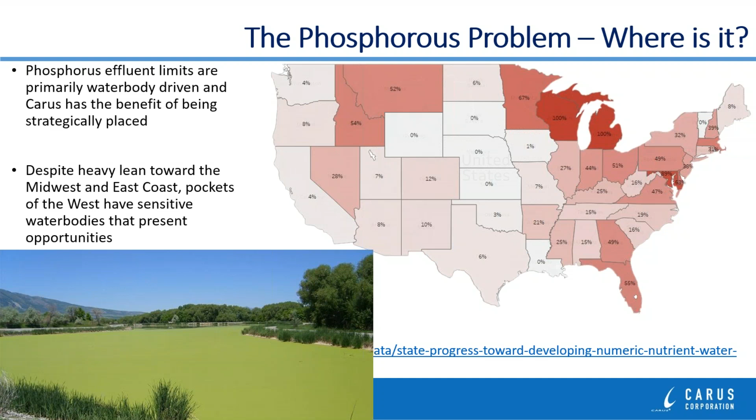In the case of aluminum sulfate, it's pretty inexpensive, it's very widely available, and it's pretty easy to use and apply. Now, there are some drawbacks to using aluminum sulfate. It's best within a very targeted pH range. Otherwise, you might have to feed more in order to get to the lower total phosphorus levels.

Dewatering can sometimes be difficult because the sludge will become gelatinous from the increased dosage of the aluminum sulfate. It does generate quite a bit of sludge when you use it. It doesn't always work the best to get low turbidity removal in your plant, which means it also can increase your settling rate, so it may take longer for the solids to settle in your clarifiers.

It does have a freezing point down to 9 degrees Fahrenheit, but you can get some crystallization in the feed lines, which means you might have to heat trace the tank and the lines if you're feeding it outside.

In the case of polyaluminum chloride, it is pretty widely available. It does create less sludge compared to the alum at the same dosage, and it does work over a broader pH range than alum. It does have a slightly higher cost than aluminum sulfate. It still does have the same slow settling rates that you would see in aluminum sulfate. In colder wastewater, it doesn't help as much with turbidity removal, but it does have a slightly lower freezing point at -4 degrees Fahrenheit.

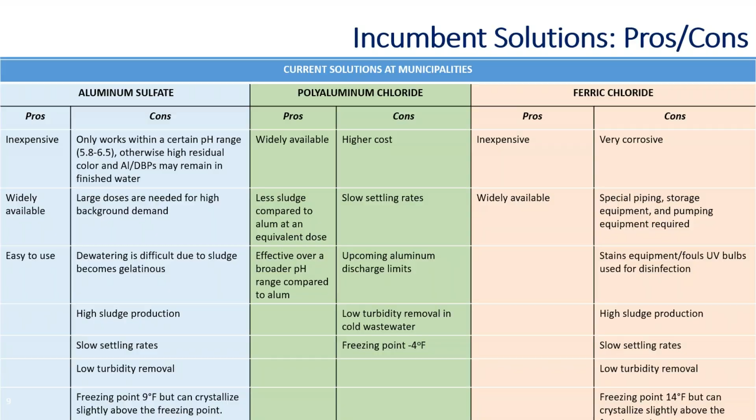So one of the challenges that a lot of plants have as their total phosphorus permit level is being lowered is that they're not as efficient when you get to the much lower total phosphorus removal limits. Typically, we talk about a molar ratio, or how much of the product you need to feed per part removal of total phosphorus that you have in the wastewater. At a level where you have a target dosage of 1 milligram per liter as total phosphorus in your discharge, that ratio tends to be about 1:1 for those products, and along with the ULNR.

As you restrict that level and that total phosphorus drops to 0.3 to 0.1, or even to as low as 0.075, that ratio starts to climb for the iron and aluminum products to the point where it becomes 3:1, 4:1, 5:1, or even more in order to get to those low levels.

At that point, you're going to have to feed much more of the iron and aluminum-based products, which means you're going to generate a lot more solids, which then are going to increase the solids loading through your treatment process, and the solids that you'll have to get rid of at the end of the treatment process. Sometimes, even with adding additional alum and iron salts, you can't get to the 0.1 or the 0.07 milligram per liter lower levels that you need to achieve if that's what your permit's going to go to.

The ULNR product is a water-soluble rare earth chloride for rapid precipitation of the total phosphorus in your plant. Because of its high concentration and its formulation, it greatly reduces the amount of product that you need to achieve those ultra-low final phosphorus discharge limits at your plant. Based on that lower dosing, that then ties into less chemical sludge that's generated in the treatment process.

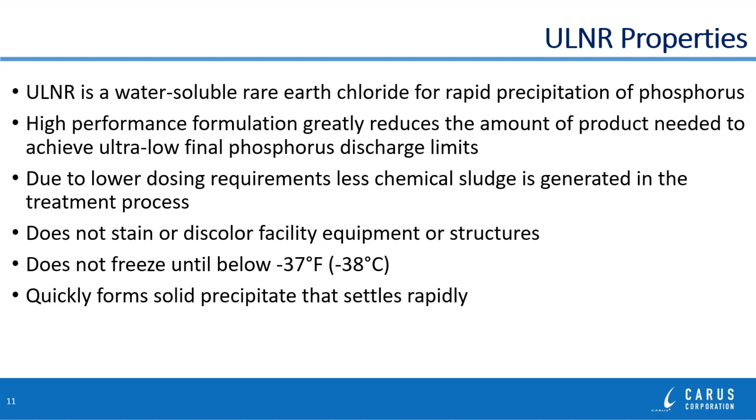At this plant where we were doing this jar test, based on the current polyaluminum chloride dosage treatment, they would need about 225 milligrams per liter of polyaluminum chloride to get from approximately 5 milligrams per liter of total phosphorus down to about 0.34 milligrams per liter as total phosphorus on the discharge. You only needed about 45 milligrams per liter of ULNR to get the same total phosphorus removal in the jar test. So you can see there's a much greater difference in dosage when you have to get to that 0.3 limit.

So let's talk about some field trials out there in the Midwest. Our first plant trial was at a 50,000 gallon per day Midwestern plant. In addition to normal wastewater from homeowners, they also had 2 cheese plants in the distribution system that added phosphorus as an industrial input.

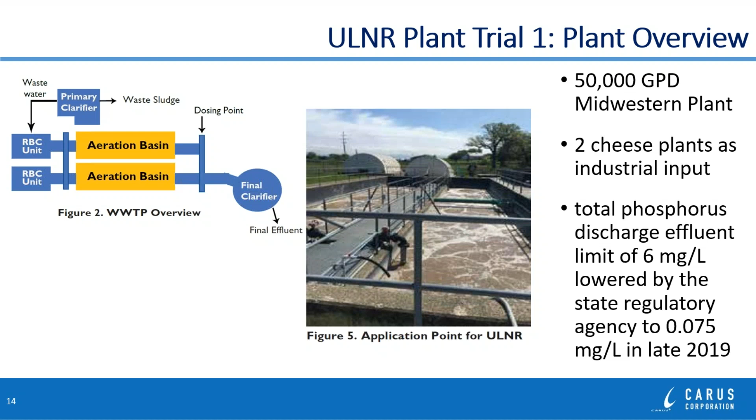Prior to doing the plant trial, we did some jar tests looking at how much ULNR would be required to remove the total phosphorus in the plant. At the time that we did the jar test, their influent level was up around about 6.5 milligrams per liter as total phosphorus.

So that translated to the plant trial. We dosed 13 gallons per day of ULNR into the wastewater. And we also changed: prior to this application, they had been applying their current product to the front of both aeration basins, and they had 2. Because we were moving it back in the process, we could treat the 2 aeration basins' effluents combined, so we only had 1 application point. So it also minimized the feed system that they needed to have as well.

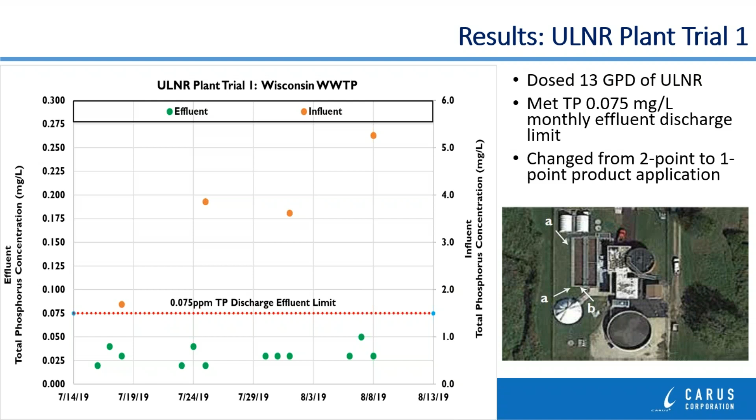Our second plant trial was a 135,000 gallons per day activated sludge facility. They got an additional 40,000 gallons per day of wastewater and sludge from private systems in the surrounding area. Their current treatment process was getting their discharge down to around 4 milligrams per liter, and they anticipated a future limit from the state of 0.12 milligrams per liter from the 4 that they were at now.

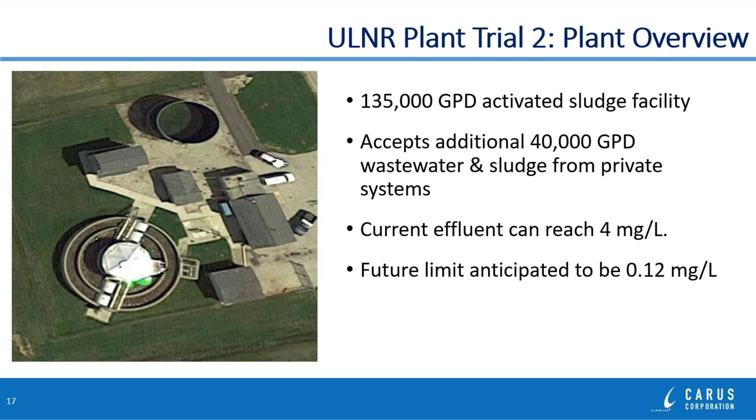Same thing here. We ran jar tests at the beginning to see what we could do to get to their new limit. And the jar test determined somewhere between 7 and 28 gallons per day of ULNR was predicted to meet the discharge permit of 0.03 for the total phosphorus target.

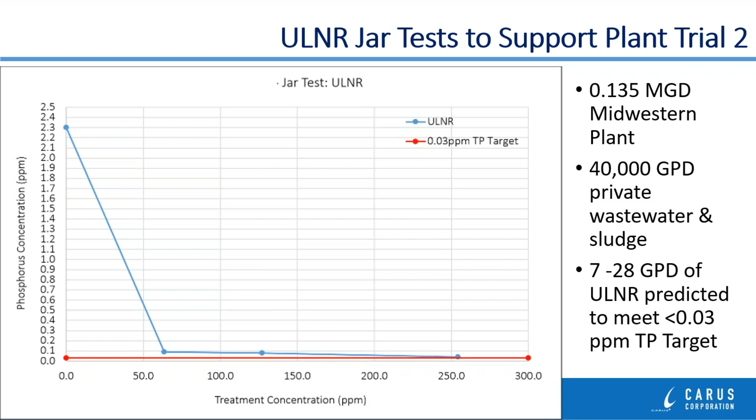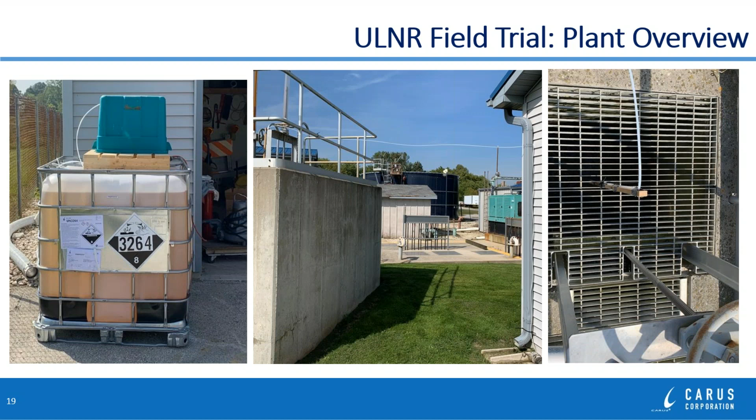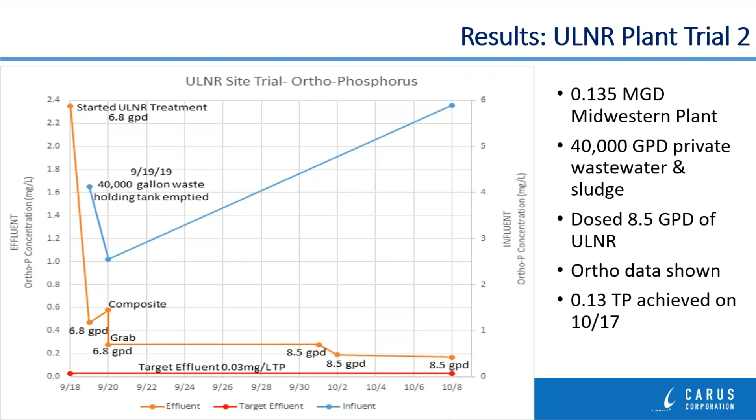Our third plant trial was a plant that was a 25,000 gallon per day activated sludge facility. They did accept some sludge, about 6,000 gallons per day of wastewater and sludge from private septic systems. Their current total phosphorus limit was 6 milligrams per liter, and they also had a cheese manufacturing facility nearby that dumped into their system. And they estimated that their future limit was going to be 0.12 milligrams per liter.

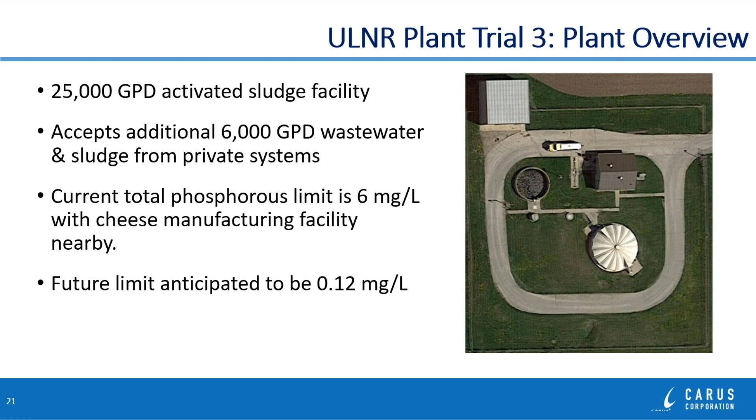Once again, we did a jar test to look at the dosage required. And we predicted somewhere between 5 and 10 gallons per day of the ULNR product was going to be needed to achieve the 0.12 target total phosphorus discharge permit. And you can see that in the graph there as we get lower where the dosage needs to be.

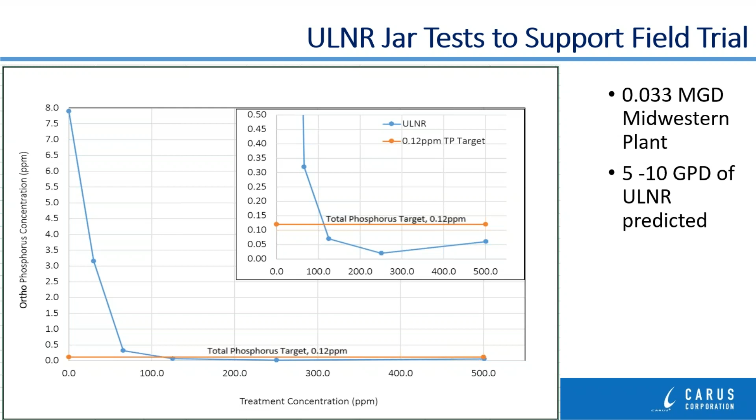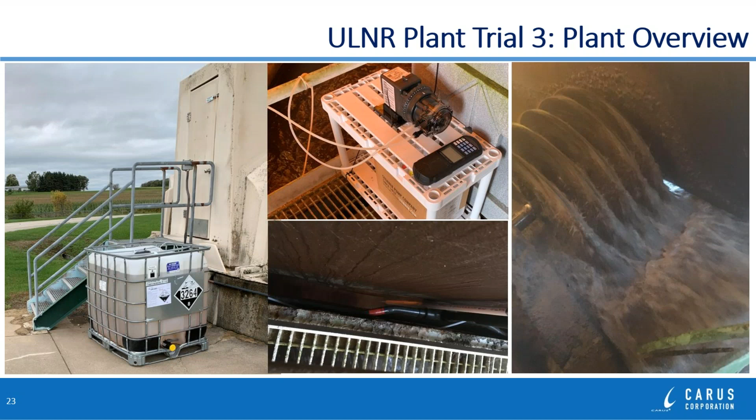Just like the other plant, the setup was a tote outside the building for our application point. We ran the feed line into the building and fed with a small Stenner point feed pump. And then you can see the application point running through the PVC pipe alongside of it with the flexible tubing, and then discharging into the discharge, where you can see there's quite a bit of turbulence. So we got very good mixing at this application point.

When we started this trial, the total phosphorus coming into the plant was up around 5 milligrams per liter. We started at about 9 gallons per day of ULNR. We quickly saw a drop in the total phosphorus down to below the 0.12 milligram per liter, which was the target. And toward the end of the trial, we even got a non-detect on the total phosphorus in their discharge. So basically a zero discharging it at 9 gallons per day.

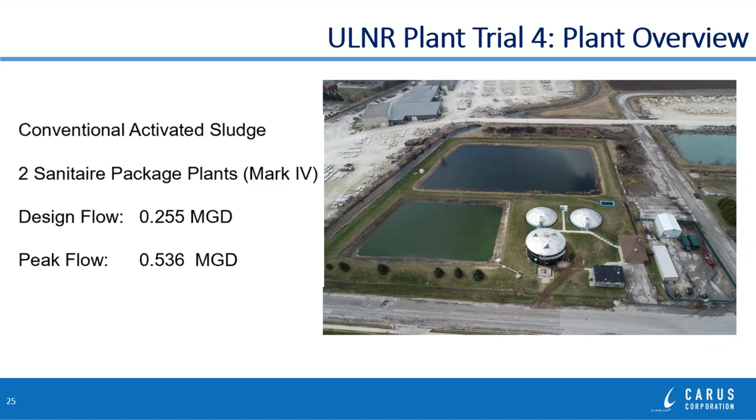Our fourth plant trial was a conventional activated sludge plant. They had 2 Sanitaire package plants with a design flow of 0.255 mgd and a peak flow of just about double that at 0.536 mgd. Once again, we ran jar tests to support the plant trial at this plant. Based on a target total phosphorus discharge limit of 0.1 ppm or milligrams per liter, it was going to take somewhere between 6 and 22 gallons per day of ULNR that was predicted based on the jar test.

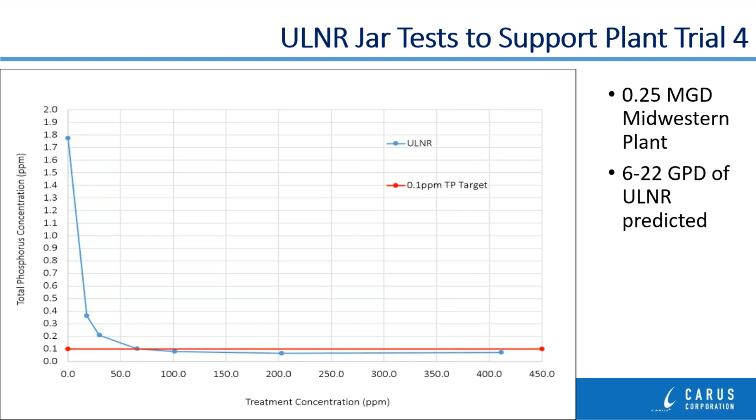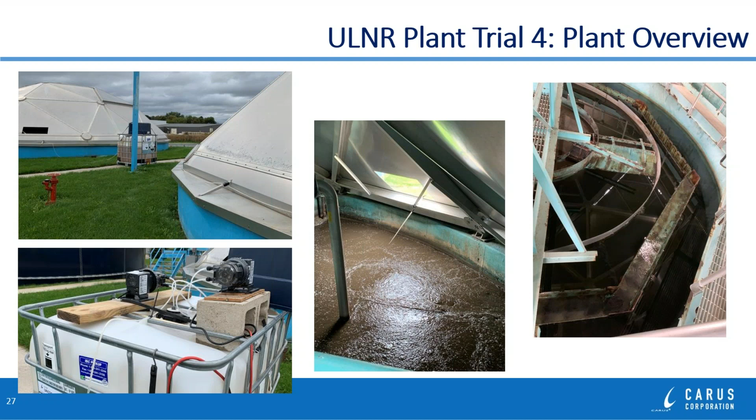Because they had 2 systems, we set up a tote between the 2 systems with 2 separate feed pumps on top of the tote and ran temporary feed lines into each of the application points so that we could control the dosage to both feed points independently. One of the things the plant had talked to us about with these 2 separate systems is they didn't always operate the same and they didn't always get the same total phosphorus on the discharge from both sides. So if we needed to adjust the dosage on one side higher than the other, the 2 feed pumps would allow us to do that for the long-term trial.

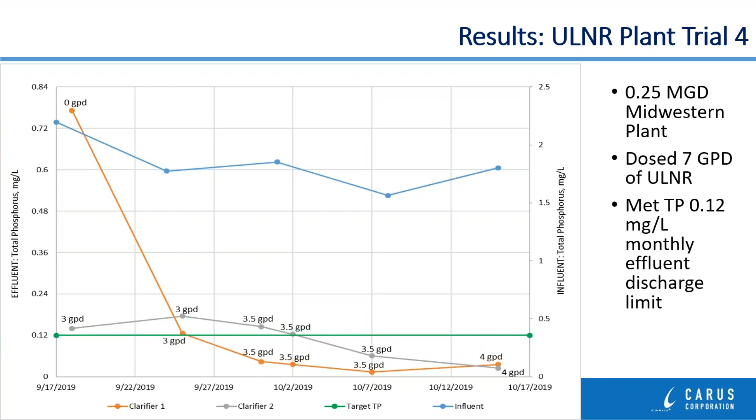In addition to the field trials in the Midwest, we also had a field trial in New England. This plant is a 350,000 gallon per day plant. They have a seasonal limit on their total phosphorus discharge from April 1st to October 31st. In the future, their limit is going to actually be lowered in April of 2022 to 0.1 milligram per liter. Their current technology that they were feeding at this plant was polyaluminum chloride at 50 gallons per day.

Once again, we conducted jar tests in support of the plant trial to determine what our dosage would be. We looked at the jar test at both the ULNR product that we were going to test and their current polyaluminum chloride product, and we targeted the current limit that they had of 0.8 and also wanted to see if we could achieve their future target as well. The initial dosages in the jar test said we were going to have to use about 34 gallons per day of polyaluminum chloride, and the ULNR would need about 23 gallons per day.

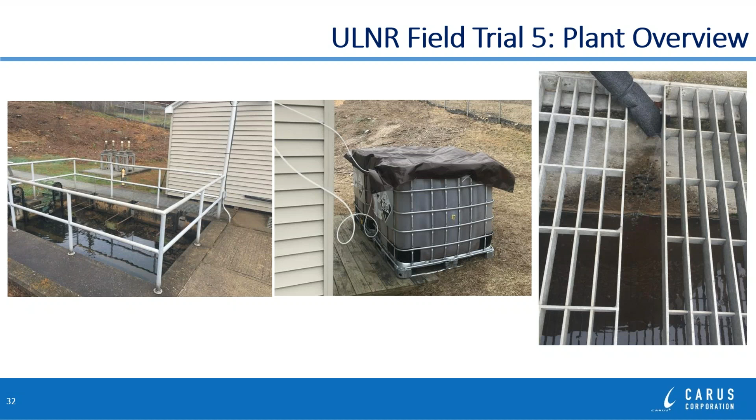During the plant trial, the total phosphorus on the effluent varied anywhere from 2.8 up to about 4.4. And we were able to achieve the target dosage of 0.8 milligrams per liter as total phosphorus with about 15 to 17 gallons per day of the ULNR product.

One of the things we also did at this field trial, besides just the jar test, was use a dosing calculator based on all the previous jar test data and field trial data that we had, to estimate what our target ULNR dosage would be in the plant.

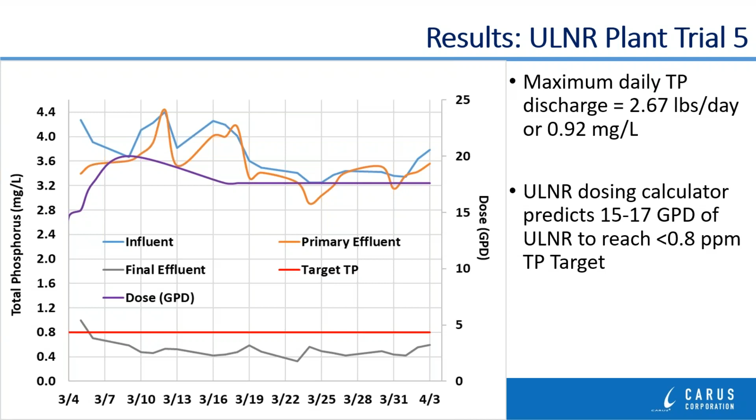We also looked in the jar test at their upcoming limit in 2022, which was going to be 0.1 milligrams per liter. The estimated dosage for polyaluminum chloride was going to go up to 61 gallons per day at that point in time. And for the ULNR, we were only going to need 27 gallons per day to achieve that lower limit from 0.8 down to 0.1 in this system. So they had a product that they know they could try in the future to get to that lower limit of 0.1 milligrams per liter of total phosphorus.

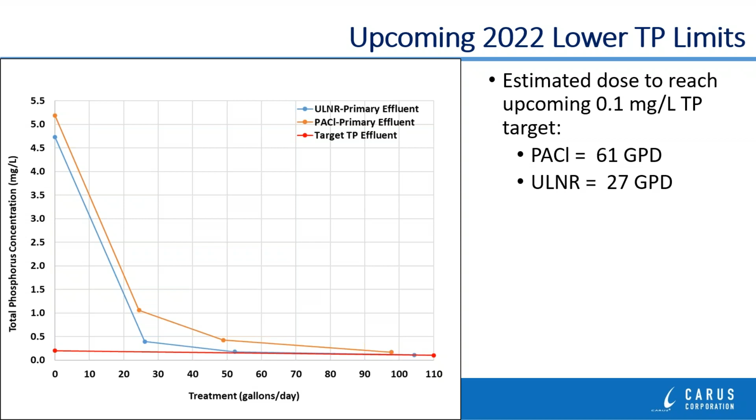So in conclusion, the rare earth chloride ULNR product is a very high performance formulation, and it greatly reduces the amount of product needed to achieve the total phosphorus limits at your wastewater plant. Based on these lower dosing requirements, where you feed less gallons per day of the product, you're going to generate less chemical sludge in your treatment process.

In addition to the product generating less sludge, it does not stain or discolor your facility equipment or structures, so you don't have to worry about that. It does not freeze until below minus 37 degrees Fahrenheit, so you might not need to put any kind of heat tracing or heating elements around your system if you're going to feed the product.

We very quickly form solids that precipitate out, taking the total phosphorus with them, and those solids settle rapidly both in the jars and in the plant, which can help with turbidity issues. The ULNR product can be used to complement an existing system. So one of the things that we talk to customers about is, if you already have a treatment process in place that achieves your current limit, you may just need a boost to get to the newer lower limit.

So the ULNR can be used to complement existing systems like disc filters, ballasted sand, or biological removal. If those processes can get you to a lower dosage of, say, 0.5 or 0.3 milligrams per liter, but they can't get you all the way down to a limit that's 0.1, you can then add the ULNR at the back of the process as a supplement to those systems and get that last 0.2, 0.3 of a part out of your system to get in compliance with your new future permit.